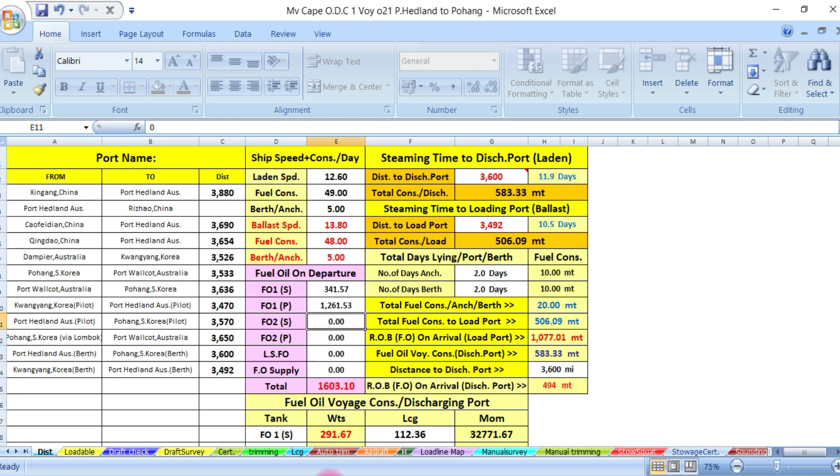So with this entire voyage, the steaming time would be 11 days, 15 hours, and 50 minutes. This will be his steaming time. Now, with this 11 days and 15 hours, the consumption of fuel will be 580 metric tons. Okay, sorry, equals minus 580 metric tons. That will be his consumption. Negative because it's consumption. And his diesel oil, his consumption is only 2 metric tons, from 50 to 48.

And his fresh water, he will have a production of 20 tons for the entire voyage. From 300 to 320, he has an additional 20 tons because of freshwater production. And his ballast during the departure from Dampier, he has a remaining ballast of 100. So to arrive in Kwangyang, South Korea, he has to pump in 500 metric tons to have an even keel on arrival at Kwangyang, South Korea. Why does he have to pump in additional ballast of 500 metric tons?

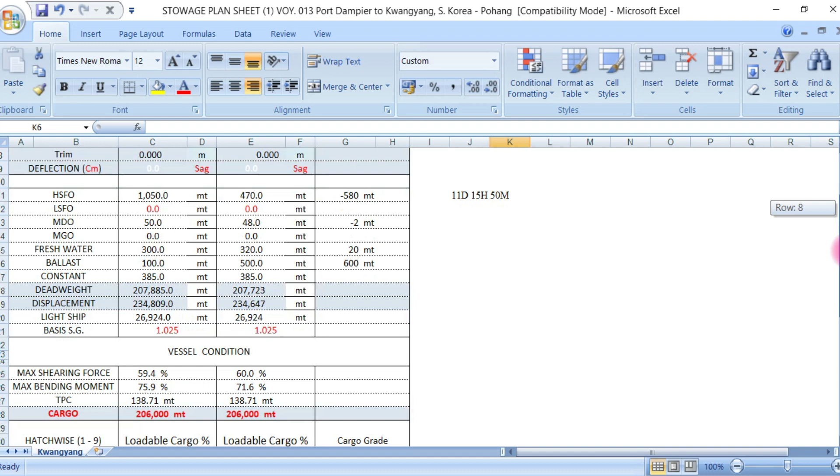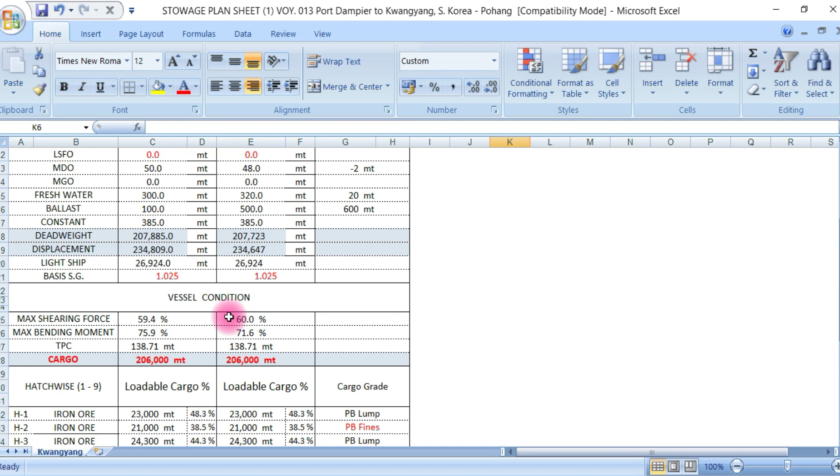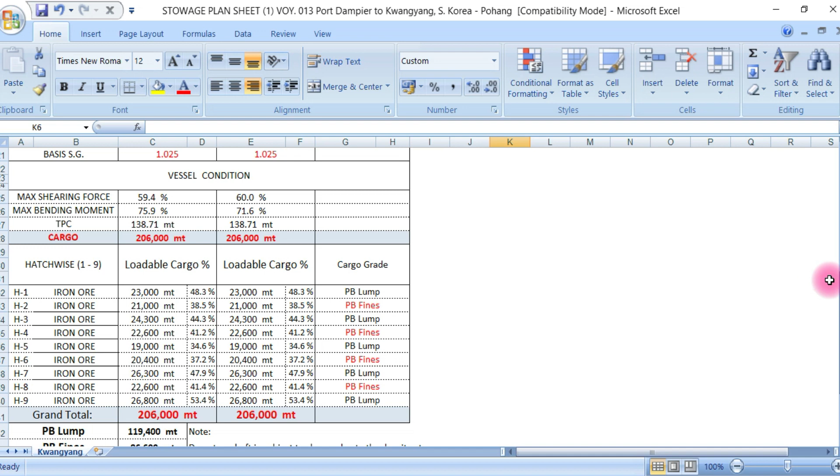So the remaining ballast during the departure plus the additional ballast upon arrival at Kwangyang, you will have a total of 600 tons. And because this is a pre-stow plan, you will see the information of his deadweight, displacement, light ship, and maximum shearing force and bending moments of departure from Australia and arrival in South Korea. And this is the distribution of the cargoes and the name of the specified cargo. So this is the pre-plan of the entire voyage.

Now we will try to compute this one. All these things were computed by this Loadicator. So let's say in the fuel tank, we will just take out the consumption while the vessel is traveling, so we will have a lesser amount of fuel upon arrival at Kwangyang, South Korea. Same with the diesel, we will have a deduction of 2 metric tons. But in freshwater, you will have an additional 20 tons. So we will try to compute this without using the Loadicator. With this program, we can compute the arrival draft of the vessel in Kwangyang, South Korea.

So we depart from Australia with 18.23 forward, and draft aft will be 18.23. The density is 1.025. The density on departure from Australia is 1.025 and arrival in Kwangyang is 1.025. So you put here the density, and here upon arrival in South Korea is also 1.025. So we will put here now the consumption of its fuel. Okay, go back. The consumption of fuel is 580. Okay, 580 fuel consumption.

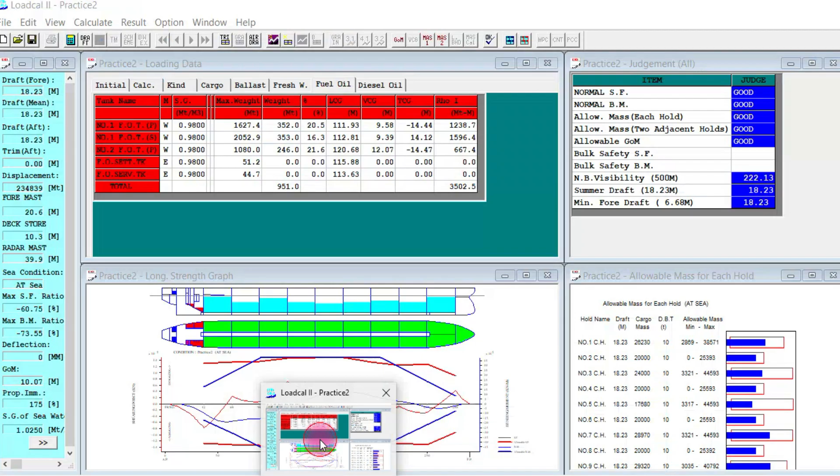So it's negative. Now the next consumption is our diesel oil, which is 2 tons. So take out 2 tons diesel oil. We take negative 2. And the tank is also on the aft part. That's why the LCG is positive. And we'll see diesel oil, tank 1 starboard. So diesel tank 1 starboard, LCG is positive 121.73.

And another one, I'm sorry, we have a production of 20 tons of fresh water. So fresh water, you put positive, meaning production, additional 20 tons. And the ballast, we have a remaining ballast of 100 and additional ballast of 500. So a total of 600 metric tons ballast.

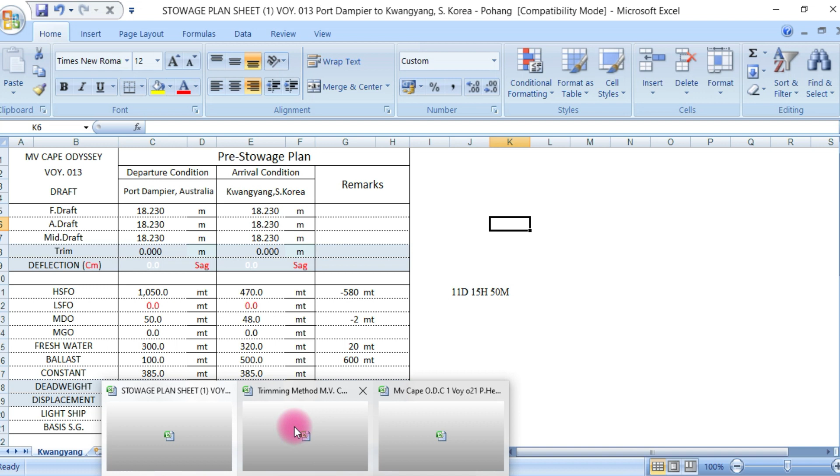So since upon arrival in South Korea or Kwangyang, the vessel's condition will be trimmed by the head because of the consumption of the fuel tank on the aft part. So we put here now the remaining ballast of 100 metric tons; it is distributed between ballast 1, 2, 3, 4, 5, 6, 7, 8, 9. Ballast water bottom, or ballast water tank from 1 to 9.

Since we don't know exactly how much is the amount of each ballast tank, I would just presume that I will just put 100 here in the forward part, and I would say the additional 500 will be on the aft part, for a total of 600. Now, what would be the draft upon arrival with this condition in Kwangyang?

So your mean draft will be 18.23, but you will be trimmed by the head because you don't know exactly how much ballast is in each tank. Let's say tank WBT number 1, 2, 3 until 9. But since we don't know how much is in each tank of ballast water, we just presume that it will be put in the forepeak tank, so it will be easy to compute.

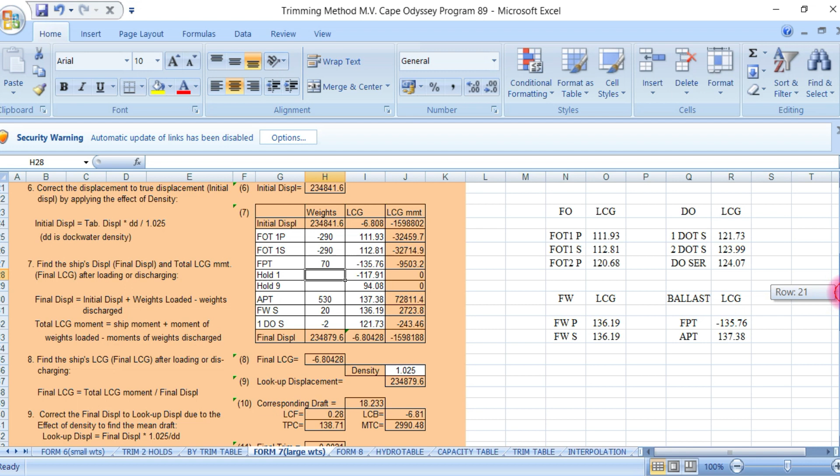So we take out 20: 530, and 50 plus 20, 70, total of 600. Okay, and how much will be the draft? Even keel, 18.23. 18.23 forward, 18.23 aft, 18.23 mid, and forward is 18.23.

That's even keel, but I want to have it exactly zero, meaning we are still trimmed by the stern. But anyway, you cannot see this 0.002 in actual reading. For the sake of accuracy, we just take out this 0.002. So we take out 1 ton here, 529, and add 1 ton here, 71. And what will be the draft?

So we still have stern by the aft of 0.001, but the actual draft is even keel. For the sake of computation, I want to take out this 0.001. So we take out another 1 ton, make it 528, and add 1 ton here, 72. Now let's see what happens. Now it's 0, so it's even keel. Forward draft is 18.23, aft draft is 18.23, midship draft is 18.23, and your trim is exactly 0.

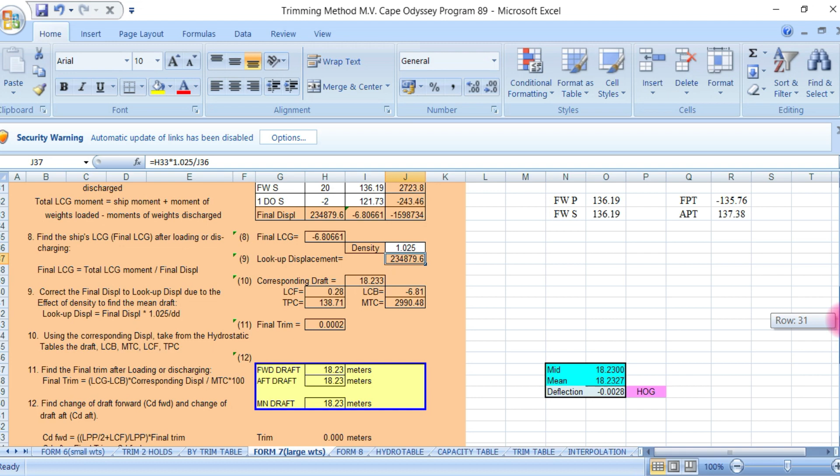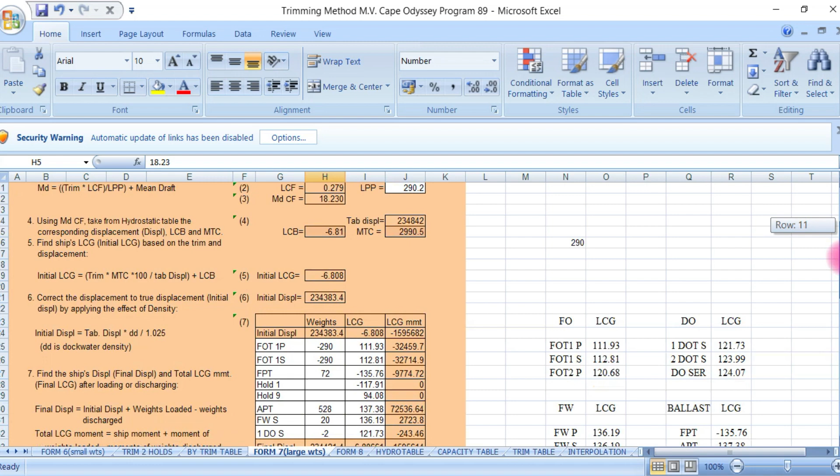But if you put it back to the original density, 1.025, then you will have a draft of 18.23 forward and aft. For example, your departure density here is 1.023, and your arrival density in Kwangyang is 1.025. What will be your arrival draft? Here you will have a trim of 0.01, your forward draft will be 18.19, and your aft draft will be 18.20. You have a mean draft of 18.20. So the density plays a big role in your draft.

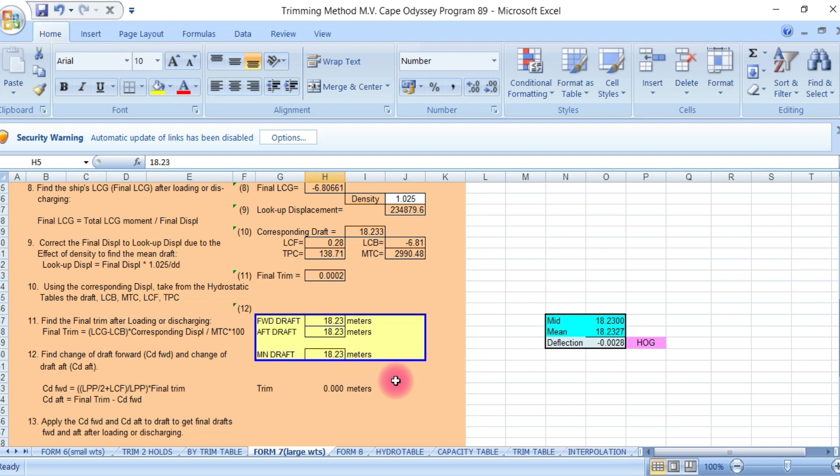So we'll put it back to the original 1.025, the departure density, and arrival density in Kwangyang is 1.025, so you will have even keel, zero deflection. The title of this program is: how to find draft and trim when handling weights involving large changes in mean draft. Actually this is a very good program because every time you put in cargo or any weights or take out cargo, you will see your arrival draft here, or the draft with the changes of your cargo.

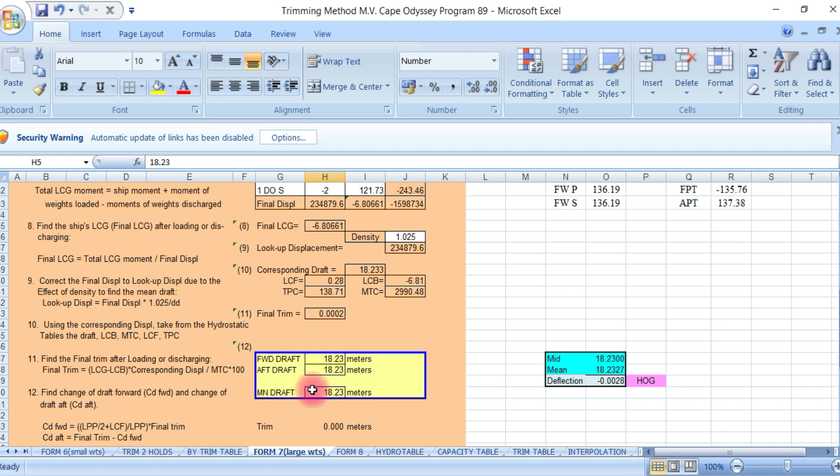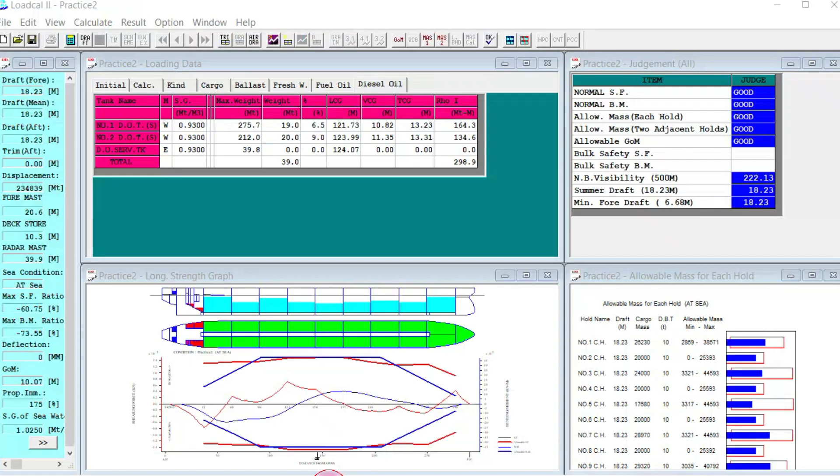Now I hope you will like this presentation. This is very helpful to chief officers for computing weights and drafts without using the Loadicator. So this is a good tool if we have this kind of program on board, just to make things easier.